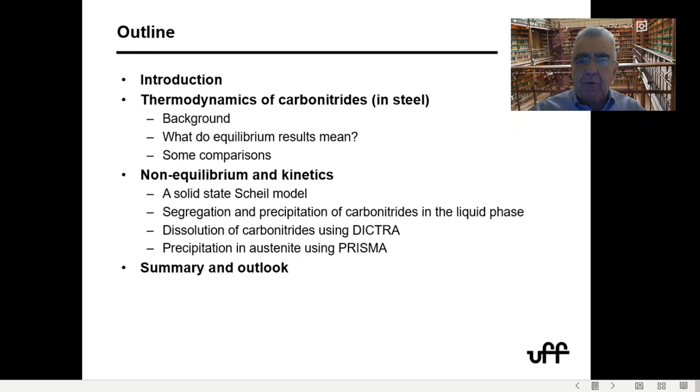The subject is the use of the CALPHAD methodology on microalloy steels. The talk outline is a brief introduction, then we'll discuss the thermodynamics of the carbonitrides, especially in steel. Since most times we are not really in equilibrium, we'll discuss methods to predict or understand what happens out of equilibrium, and also get some idea of the kinetics of these processes. Finally, I hope to give an outlook on the near future and how these methods can be useful.

If we look back on how this knowledge about carbonitrides developed, it has developed mostly in two ways: one part related to the compounds themselves, and the other part in relation to their solubility in steels.

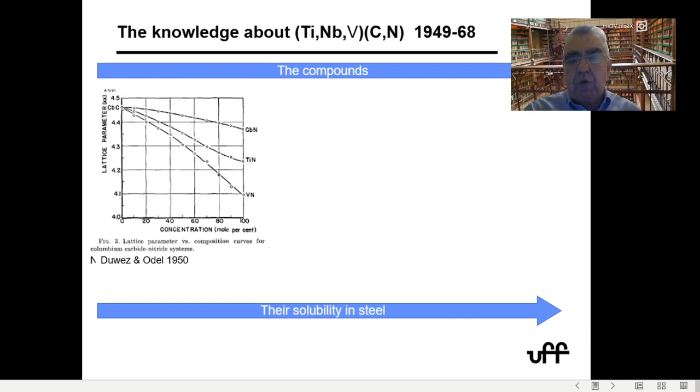The compounds were studied back in the 40s, late 40s, early 50s. This graph shows that back in 1949 it was already seen that niobium carbide, titanium carbide, and vanadium carbide had full miscibility - complete miscibility was observed. Later, very close in time, the miscibility between niobium carbide and niobium nitride was observed, as well as titanium nitride and vanadium nitride. So these cubic carbides were fairly miscible over a wide range of compositions.

Also interesting, back in the 50s, it was observed that the stoichiometry of NbN, for instance, was not exactly 1-to-1, but was somewhere lean in nitrogen. This was an important observation too.

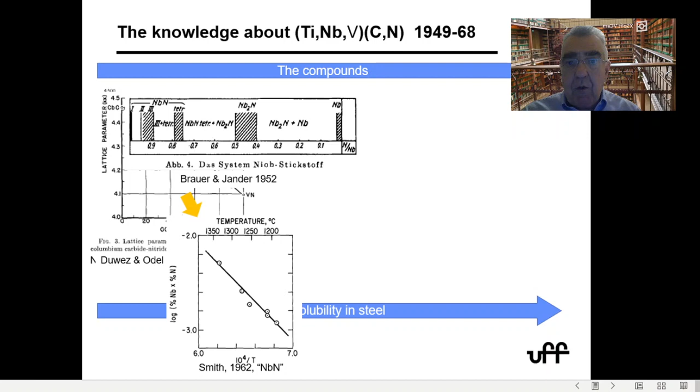Back in the 60s, 10 years after that, there was the first attempt at determining the solubility product of niobium nitride in steel, not niobium carbide. This was done by Smith, who measured the solubility of the nitride.

But 3 years after that, Mori in Japan tried to measure the carbide solubility, and observed the non-stoichiometry of the carbide, noticing a different solubility product compared to Smith's value for the nitride. He also noticed that the composition was not just niobium carbide or niobium nitride, but there was miscibility between the compounds.

Then Irvine tried to solve this by introducing an atom-to-atom ratio, but this is not really a good solution because you're not really taking into account the mixability of the two compounds.

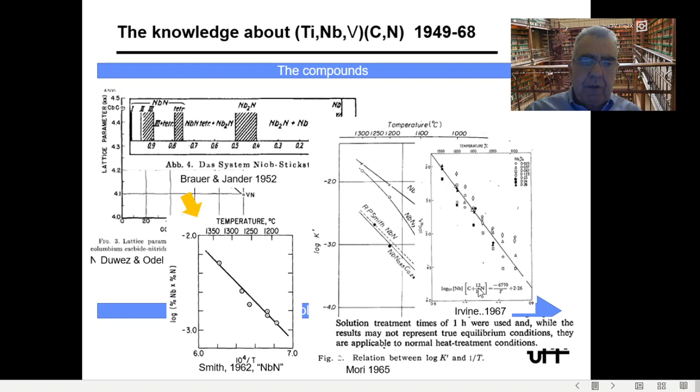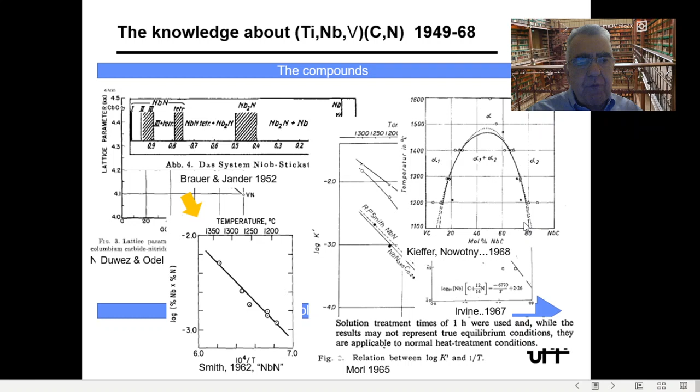Further continuing on the compounds, the people at Plansee did interesting work, and realized that some carbides, like vanadium carbide and niobium carbide, had a miscibility gap at some temperatures. So the high temperature miscibility could disappear at lower temperature - we're talking about 1200°C, not that low.

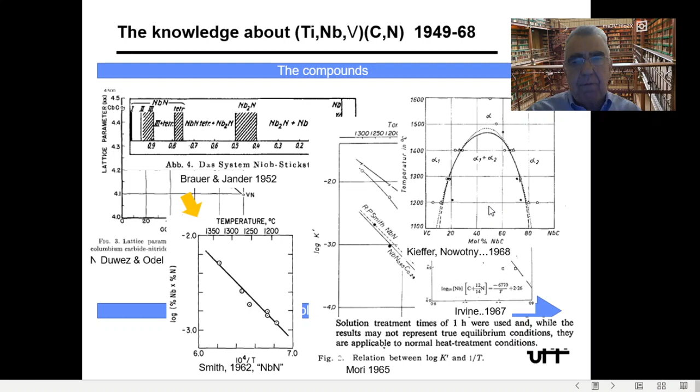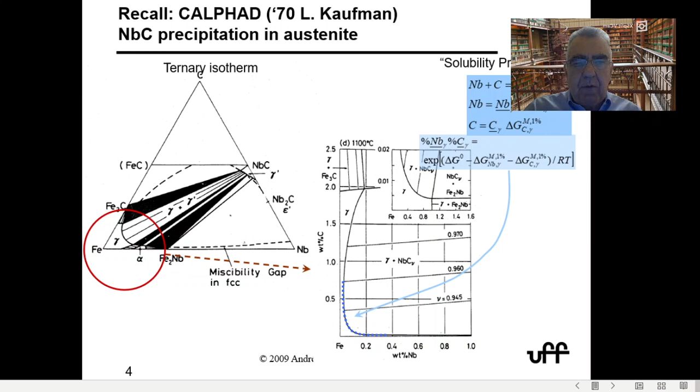Then in the 70s, the CALPHAD method came in. Using this, we could see that the solubility and the miscibilities of the carbides were very similar, and you can use solubility products to get phase diagrams. This was a big breakthrough, I think, by Larry Kaufman and the CALPHAD people.

Continuing on the same line, in the 70s Mats Hillert and Staffansson developed the compound energy formalism model - interestingly, Rudy did the same some 3 years earlier. The idea was that if you have miscibility of two compounds like titanium nitride, titanium carbide, niobium carbide and so on, you can assume there's mixing in different sublattices. This became a real important movement in the CALPHAD community, based on the mixed salt ideas.

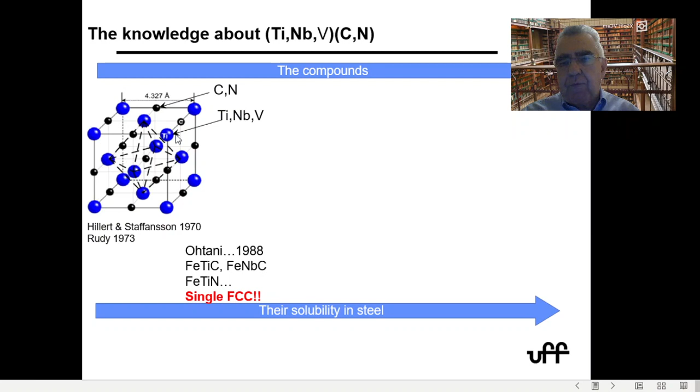Then in 1988, Hiroshi Ohtani was the first to come up with the idea of having a single FCC phase - from the FCC phase of iron to all the carbonitride, modeled with a single FCC phase. There was some improvement because Ohtani's results were not really very exact, and Balasubramanian and Kirkcaldy improved the results, but not the model.

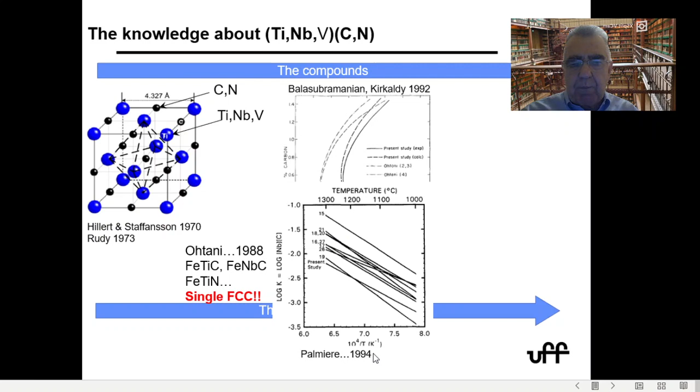And then in '94, you see the situation was already very confused when Palmiere tried to summarize all the different solubility products that we had for microalloy steels.

This continues with many assessments in the CALPHAD method and much work in the solubility product arena, mostly by Irvine, Turkdogan, and Palmiere. If we look at some results obtained with steels, we see...

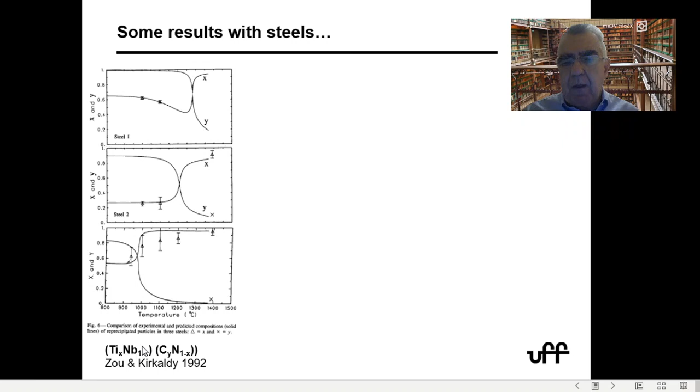Zou and Kirkcaldy, for instance, measured very carefully titanium niobium containing steels. They showed very clearly that there was compositional variation depending on the temperature. So the carbides were not really titanium nitride and niobium carbide as we would like to think, which is very simple, but they were much more complex.

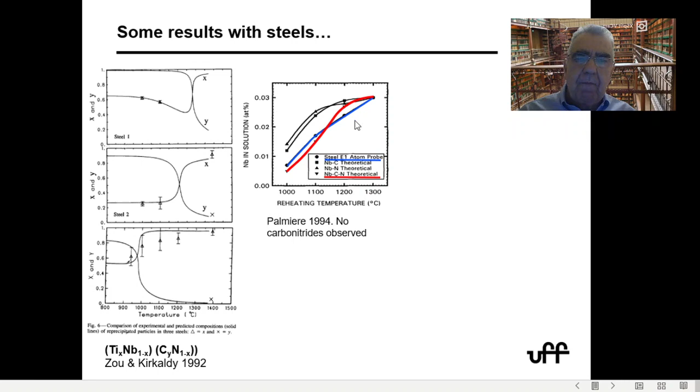Palmiere tried to simplify, and he calculated, he did atom probe, he measured the composition of the steels and the solubility, but then it's a little bit conflicting because he said there were no carbonitrides in his steel, but the best fitting for solubility was the carbonitride solubility product.

Later on with the assessment by Karin Frisk, we see very good agreement of the compositions, and also she was able, and all the assessments from there on were able to describe very well the miscibility gap, for instance here between niobium carbide, vanadium carbide, vanadium nitride, and niobium nitride. This is the region where you have immiscibility around 1000 or 1200 C, and these are values measured with TEM, so it's a real challenge to do this experimental measurement, but you can see the modeling works very well.

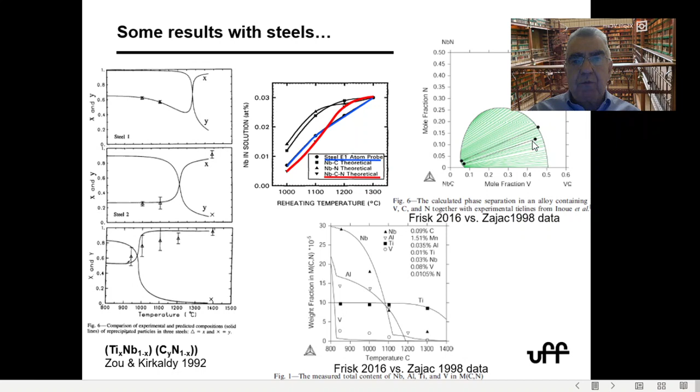Now, when you compare the values calculated by this CALPHAD methodology with some classical solubility products, you see, for instance, if you do it for one of the steels that Palmiere used experimentally, that the value he calculates or proposes with this formula is quite different from the value you calculate with the thermodynamic databases, considering that the compound is not exactly niobium carbide, but a carbonitride.

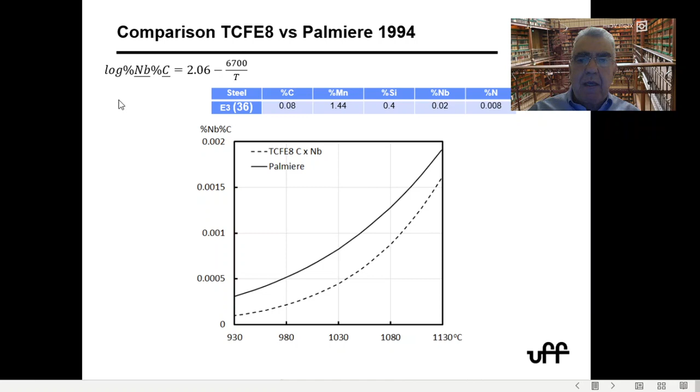The same happens if you take Turkdogan's compound, in which he assumed a fixed stoichiometry, because this is not really happening, that you have a fixed ratio of carbon to nitrogen. And if you project this surface into a plane, you can see that the values for solubility are much different because there's no way you can really take into consideration the influence of varying carbon and nitrogen in the compound.

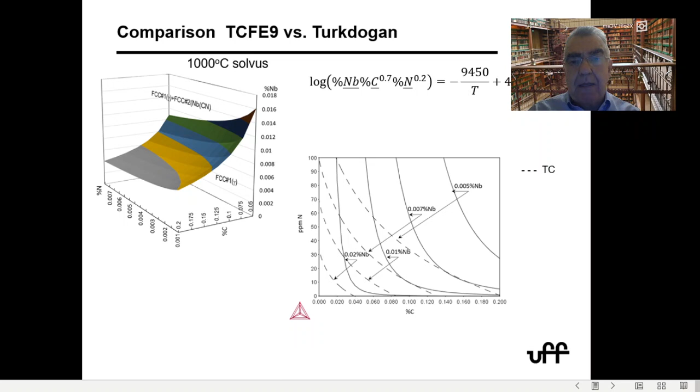So the values predicted by these simple formulas are not very accurate compared with computational thermodynamics. Now, of course, the fact is that when Turkdogan and Palmiere did this, it was not very easy to take into consideration all this data. Now the softwares are available, and you can do these calculations rather easily.

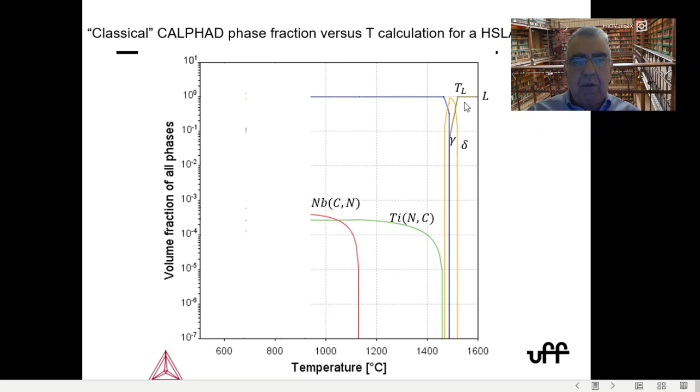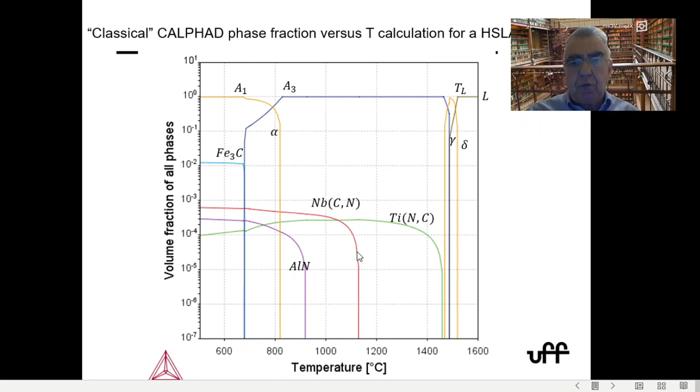So you end up doing this classical temperature versus volume fraction of phases for the steels. And if you start with the liquid, you can see the liquidus temperature, you can see the formation of ferrite, you have a peritectic reaction, then you precipitate one carbonitride, which is richer in titanium. I just simplified here, of course. Then a carbonitride that is richer in niobium, more like a carbide, then aluminum nitride, and so on. This gives you very easily the solubility or precipitation temperature if you want to reheat this steel to dissolve the carbide and so on in equilibrium.

Now, if you want to really look into more complex steels like this one, which is a vanadium, niobium, titanium steel, and you take into consideration the whole composition, you see that again you have a first FCC phase that is a titanium carbonitride, mostly rich in titanium. Then at around 1100, you precipitate a niobium carbonitride. Then at a lower temperature, you precipitate vanadium nitride with carbon on it. And you actually see all these compounds when you do TEM on this steel.

Interesting enough, when you try to look at the composition of this FCC phase, you have a very strange variation. The titanium, for instance, is very high, about 90% of the metallic content in the carbonitride at high temperatures. But when you come down in temperature, the titanium does not stay very high, and you have lower and lower titanium, with niobium and vanadium increasing.

Now you may think, well, this is very strange, because how is this titanium going to come out of the precipitate and the niobium going to enter as it grows? Of course, this is what would happen if you equilibrate your steel at these temperatures, and not what will happen if you process this steel at a constant speed of cooling, for instance.

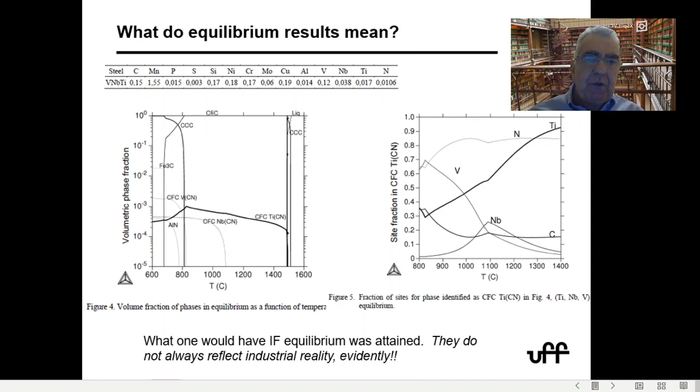And also, if you're looking at the thermodynamics, there's really no sense in introducing kinetic deviations on the solubility products. Those should be done afterwards, when you're doing the actual kinetic calculations with the proper thermodynamic data.

So in summary, computational thermodynamics can now give you a very consistent prediction of equilibrium information for these carbonitrides of all the microalloying elements, considering not only the different compositions and temperatures in which they occur - which is already a big challenge, since they occur from relatively low temperatures in steels, like vanadium nitride, to very high temperatures for titanium nitride.

But you can also take into consideration the effect of other solutes - how manganese affects this, how carbon affects this, how silicon affects it by changing the activity of carbon. So there's a whole range of information you can get here for your alloy design that you could not get just by doing a simple solubility product.

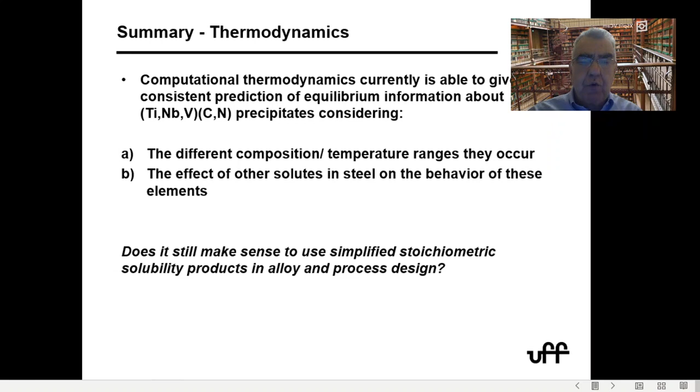So the question is, does it still make sense to use a simplified stoichiometry, a fixed solubility product, when you do your alloy design or process design? I'm not going to answer this - it stays as a question for you.

Now, when you try to add these more expensive microalloying elements in steels, you have to be careful, because sometimes you have significant losses, not only in steelmaking, but also in solidification. You can see titanium nitride precipitating as relatively large particles, and sometimes even niobium and vanadium being present in these particles. So one important thing is to model what's happening during solidification, so you can better design your alloy to avoid this.

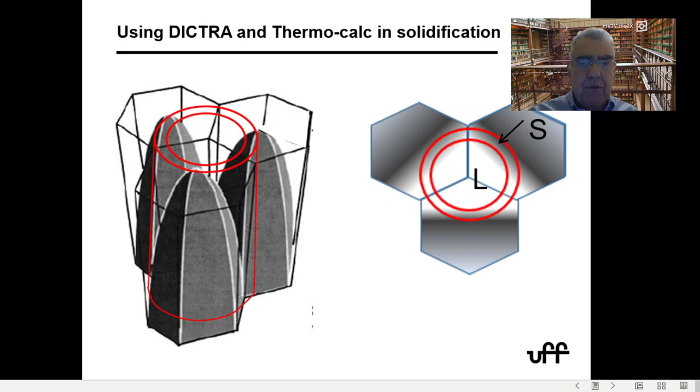So what we do is take the secondary arm spacing to model the segregation. Since DICTRA can only handle simple geometries, we imagine that this interdendritic space is like the center of a cylinder placed in this position. This is more or less the physical model we're doing with diffusion. DICTRA can only model diffusion, but it models very accurate diffusion with the proper thermodynamic data and proper interaction of the diffusing elements.

Then we go back to measuring the steels - this is a microprobe measurement - to find the secondary arm spacing, and with this we can derive the cooling rate. If we do the microprobe for these two steels as an example, we can get the secondary dendrite arm spacing from this; for this steel there was only primary dendrite arm spacing. Then with the Suzuki relationships, or any other good relationships, we can derive the cooling rate at this position.

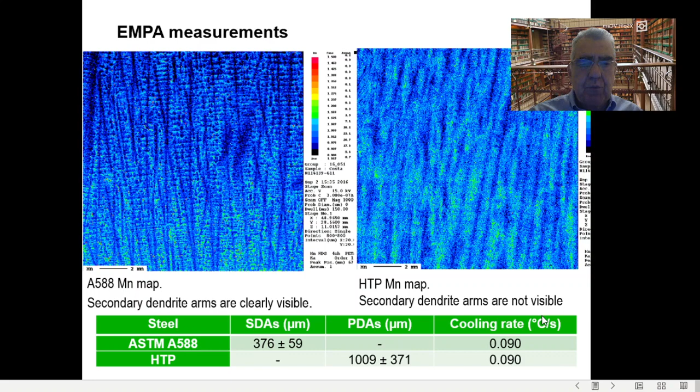Now with DICTRA we can model the segregation. The blue line is the segregation as modeled from the interdendritic region, from the center of the dendrite to the interdendritic region, and the green squares are the experimental points from the microprobe. You can see that DICTRA models the segregation fairly well - I chose manganese to present here because we did all the microprobe measurements using manganese.

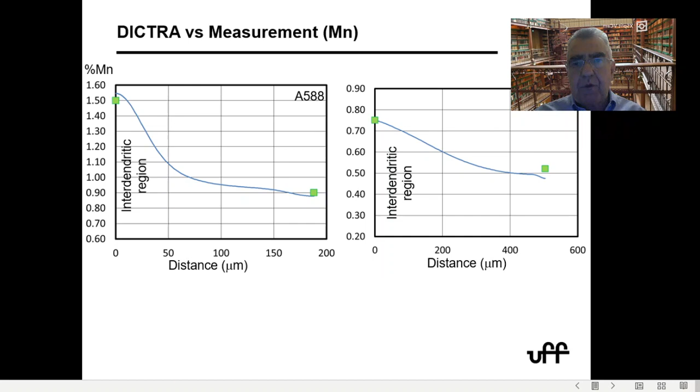And you can see right away that not only is the modeling good, but a byproduct of this is that if you increase manganese and increase carbon - which is the case with this steel - you get much more segregation. This is going to be a problem for your niobium and titanium, which will also segregate when they are pushed by the liquid.

We can also use a one-dimensional or zero-dimensional model, the SCHEIL model, in which you assume that elements go into the liquid and partition but never partition back to the solid. It's a very classical way of describing solidification, devised back in 1942, I think. With the SCHEIL model, if we exaggerate the segregation, we can also see when these carbides or carbonitrides start to precipitate during solidification.

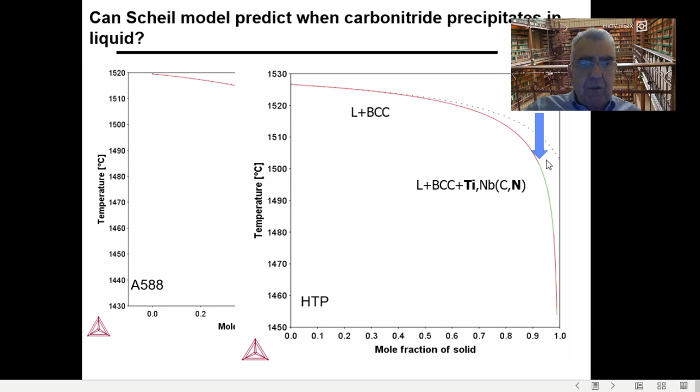Now, when you compare the two methods, the more sophisticated diffusion methodology with the SCHEIL methodology, we find that the temperature at which the carbonitrides precipitate is very similar, maybe 10 to 20 degrees difference. So if you're looking just at the temperature of when precipitation happens, it's not too bad. You can use either one.

If you want to really have a better look at what's happening during solidification, diffusion modeling is much better. So what we can do is quantify how much microalloying we are losing to large particles, because this is never going to dissolve completely again. And then we can also evaluate how the segregation of carbon, manganese, silicon influences our titanium and niobium losses due to segregation.

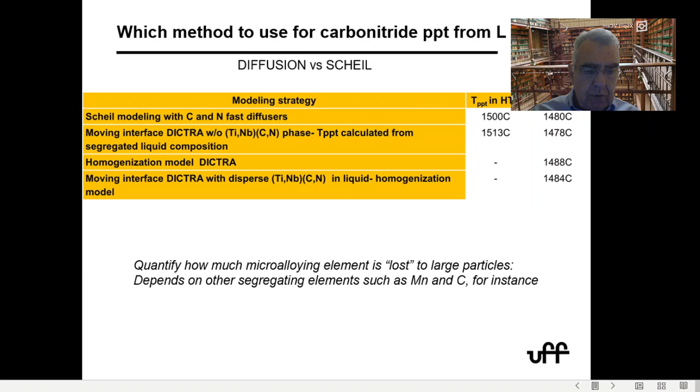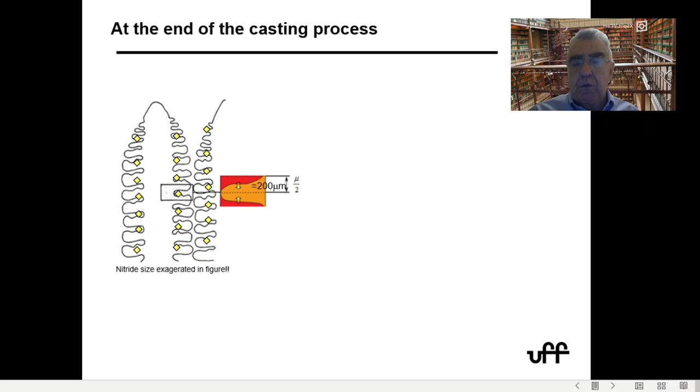So at the end of the casting process, if we have titanium additions, you can have a very dramatic situation. I put very large nitrides here so they're easy to see, but you have nitrides which are not uniformly distributed, and they may also have niobium or vanadium in solution.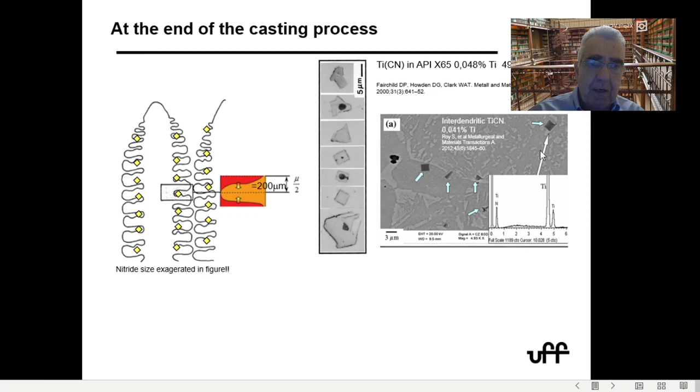This is also on a microalloyed steel, and you see this is the interdendritic region, with a lot of particles collecting here. This is another work by our group in which you see very large titanium carbonitrides, and you also see relatively large particles of titanium nitride in segregated regions.

So this is essentially material—alloying elements that you paid for, you add to the steel, but you're not going to be able to use it because it's going to be present as large particles that are not going to dissolve afterwards.

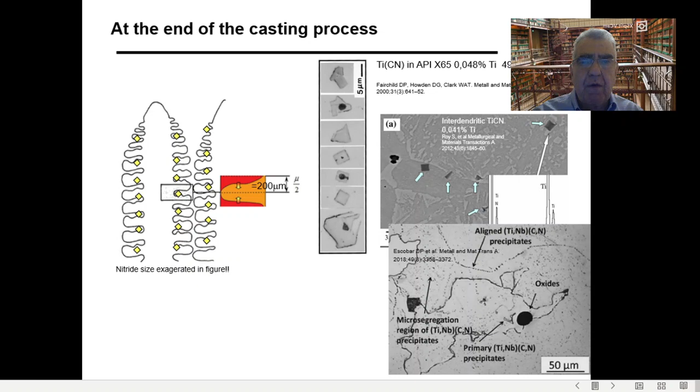So when you go now with the plate into a plate furnace, you're looking into dissolving particles so that you can have mostly niobium and vanadium in solution. Niobium is going to have a nice effect on austenite grain size, and vanadium may precipitate afterwards.

And nowadays we are also looking at titanium to precipitate at very low temperatures, like 500, 600 degrees, maybe during coiling. So it's really important to understand how much you're dissolving of what.

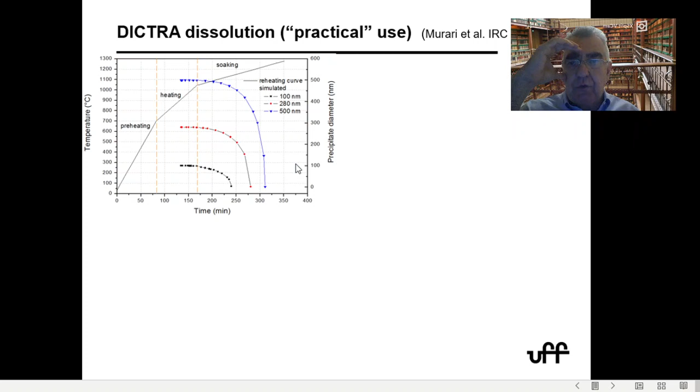Now, one way of looking at it: if you have your heating cycle for the plate—this is an industrial heating cycle—then you can use DICTRA or a diffusion model to calculate for different size particles how they dissolve. And then, using the same heating curve, you can calculate how much niobium you have in solution, depending on the size of the particles.

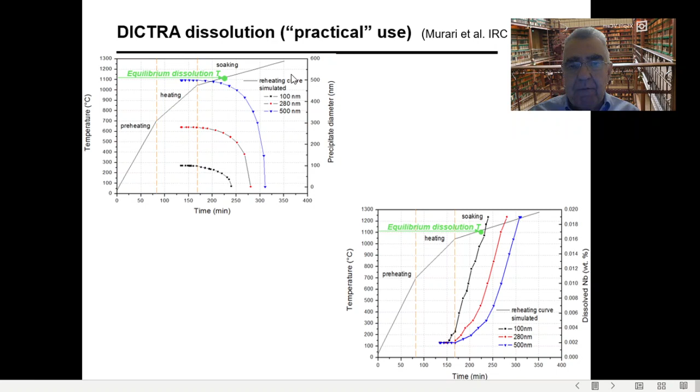So with this information, you can actually get how much niobium you're going to have in solution to help you during rolling. Keep in mind this is not happening at equilibrium dissolution, because it takes a long time to dissolve if you're going to the equilibrium dissolution temperature. So normally you have to overshoot, heating higher than just the equilibrium temperature.

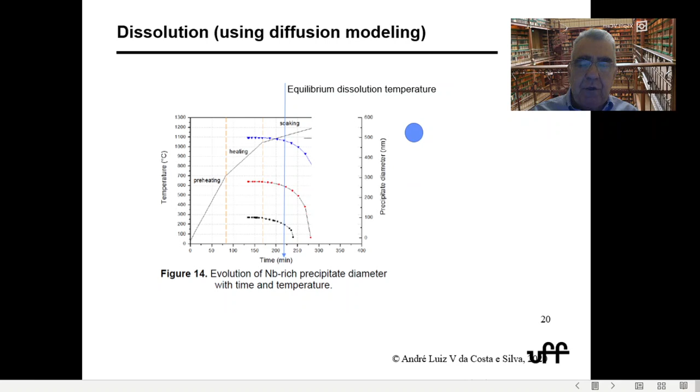This is the same idea, just a little animation. When you reach the equilibrium dissolution temperature, some particles dissolve completely—the small ones. If you continue, then the medium ones dissolve, and if you want to dissolve a half-micron size particle, then you need more temperature and longer time.

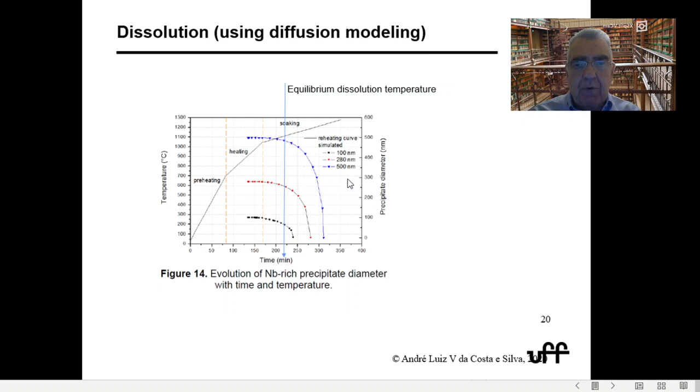So this is what you have to do when you design your process: you have to know what happened during solidification, what kind of carbonitride you still have in medium to large size, what is lost and what is not lost. So if you assume that half a micron is the size of carbonitride you want to dissolve, you can fairly well design your plate heating to achieve that.

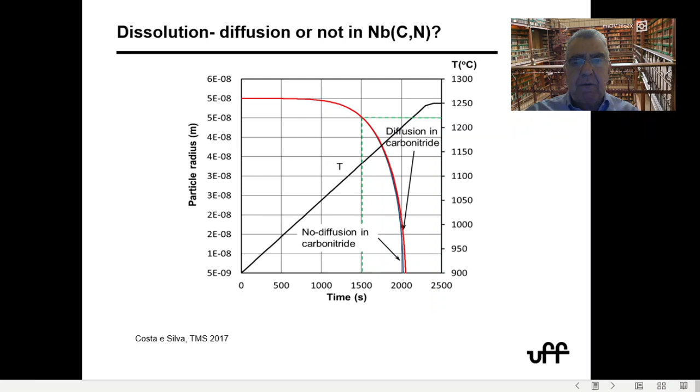There was a question some years ago whether there was diffusion in the carbonitride or not. Physically, you would believe that there's no diffusion inside the carbonitride. But we did calculations assuming both, and the controlling step was not the diffusion in the carbonitride. So essentially what we found was that it's not relevant whether the diffusion is happening in the carbonitride or not.

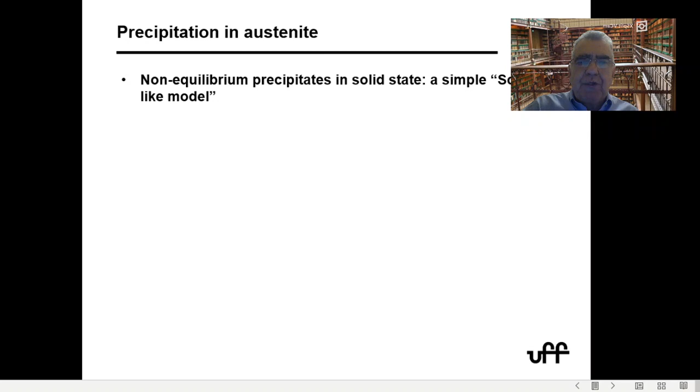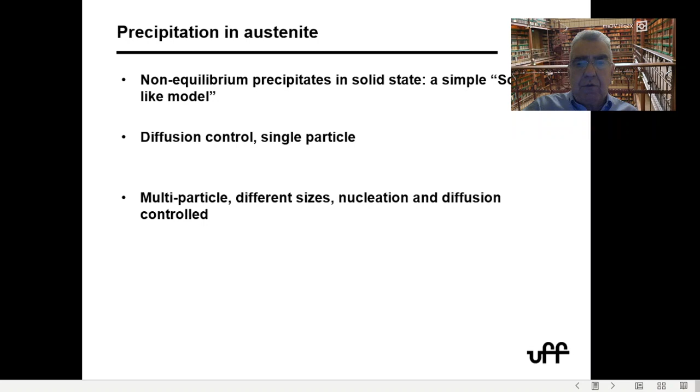Now, the most interesting thing is that people do a lot of work only on the precipitation. Of course, there's a lot of information that is essential for proper processing happening before the moment you're going to do precipitation. We can do a simple SCHEIL-like model in austenite that gives a very nice prediction. We can do diffusion control in a single particle, which I don't think I'll show you today. And then you can do multi-particle, different sizes, nucleation and diffusion control, which is the latest news in the area. So I showed you this case a little bit ago.

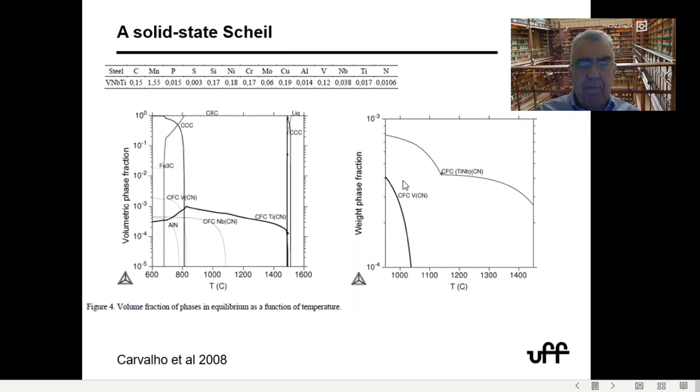Now if you assume there's no diffusion inside the particle, and there's perfect diffusion in austenite, you get very close to a SCHEIL model. We did that back in 2008, and presented it in Italy too. So you see this phase fraction change. Instead of having three different FCCs or three different compounds precipitating, you have one, and then it changes dramatically the speed of precipitation with temperature, and then we have the vanadium carbide here. So there's a big change already in the fraction of precipitates.

Now, if you recall the composition of the equilibrium carbonitride I showed you, and we do the same with this SCHEIL model, we have a much different change. We have less titanium, so this is like forming in layers. We have that initial layer which is titanium nitride, and then it continues, forming layers more and more rich in niobium, until you get to a point where it changes to niobium carbide. This is happening when you look at the phase diagram, where there's a huge miscibility gap between the four compounds it can form.

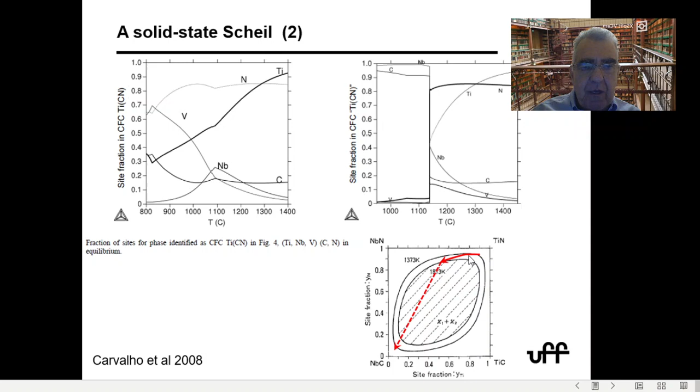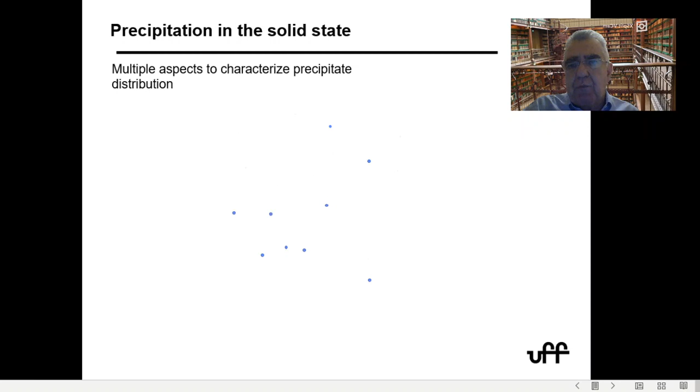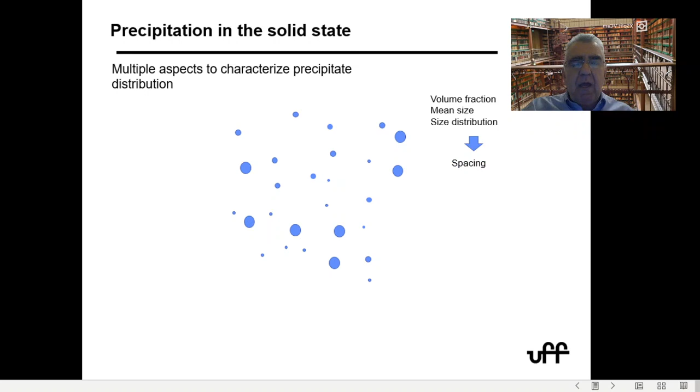Now, the problem with precipitation in the solid state, and that's why I'm not going to show you DICTRA calculations, is that there are multiple aspects needed to characterize the precipitate distribution. Reality is much more complex than a single particle, so you have to look into volume fraction, mean size, size distribution, and then you need information about spacing, and also try to predict the effects.

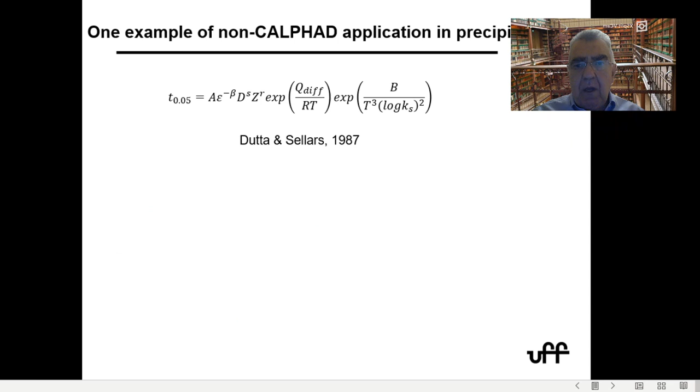Now, what people have been doing is using very classical equations, taking the classical formula for nucleation and growth, like Dutta and Sellars did. It's very nice work, calculating the time required to reach a certain volume fraction of precipitate. As this goes on, the thermodynamics is here, right? This is the solubility product. As this evolved, we got to a point where some authors now say that this value A, which was by Dutta and Sellars and was supposed to be a constant, is not really a constant. It depends also on the solubility product.

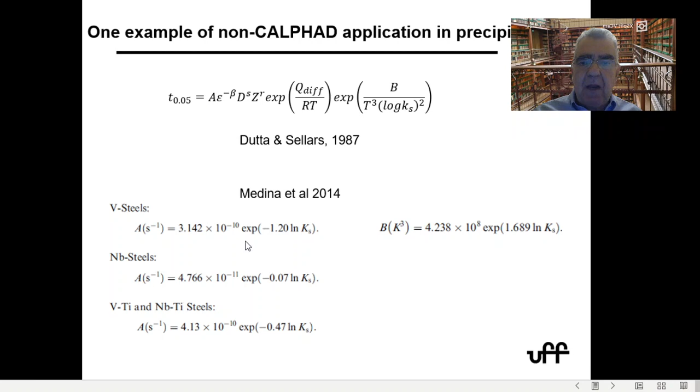If it is, then it depends also on which elements are present. So the question I want to pose is: does it make sense, when from theory this is supposed to be independent of thermodynamics? Now you have a solubility product here too. So when you use classical theory for nucleation and growth...

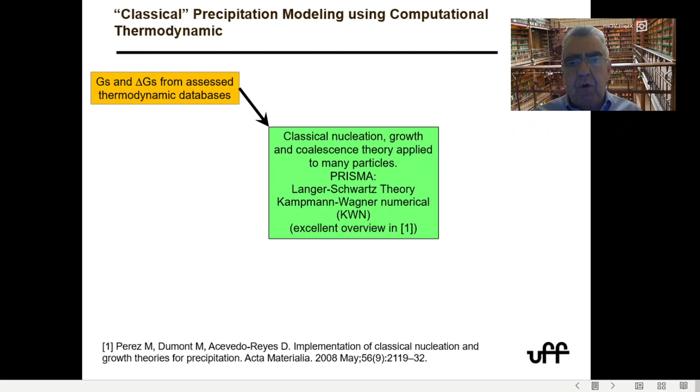There are some very interesting models now. There are 3 or 4 software packages that do that. You take the thermodynamics, you take the diffusion data, and you take a number of experimental information like grain size, dislocation density, and so on. And then, if you are able, you also need to know the interfacial energy.

And then you are able to make predictions using the classical theory, but not just by hand waving, but by using really correct free energies and correct mobilities. And this is very, very promising.

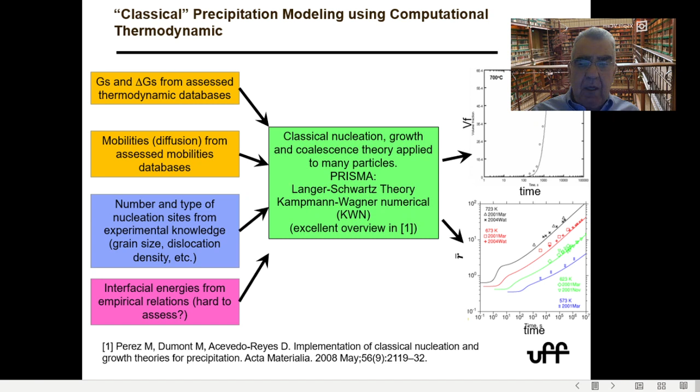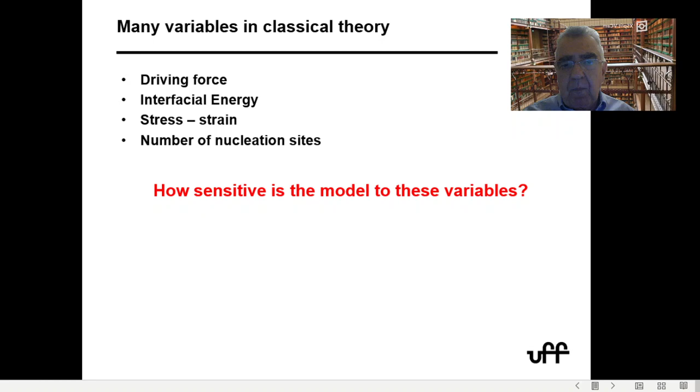Now, of course, the classical theory involves driving force, interfacial energy, stress and strain, number of nucleation sites. And so the question is how sensitive the model is to these variables. And the problem is it is very, very sensitive.

If you look at the interfacial energy, all the formulas for critical radius, for the critical barrier for nucleation, they all depend on the interfacial energy. So this is the critical parameter. And unfortunately, if you look at the literature, they used to be determined by nucleation and growth experiments. So it's kind of a real bad cycle.

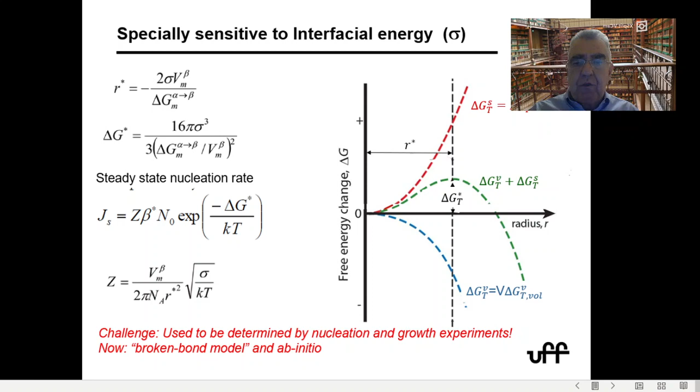Now the softwares are using these broken bond models and ab initio calculations to try to solve this. If you go to the literature and look into the interfacial energy between austenite and nitride or carbides, there's values everywhere. You can find from 0.1 to 1.5 joules per square meter.

So essentially what becomes is you have a very, very sensitive model to a given parameter. Then this parameter varies immensely when people fit or measure or whatever. So it becomes a very dangerous exercise because you can almost fit anything by adjusting this little parameter.

And then worse than that, you can go in the literature and say, well, when you find that it was 0.4, you say, wow, this was according to this reference. And then you say, wow, fantastic, I solved my problem.

So the new softwares now, they have models in which they calculate sigma as a function of temperature and composition. This is just a graph from Prisma that shows you the effect from 0.51 to 0.66, how it varies at a given temperature just by varying nitrogen and carbon.

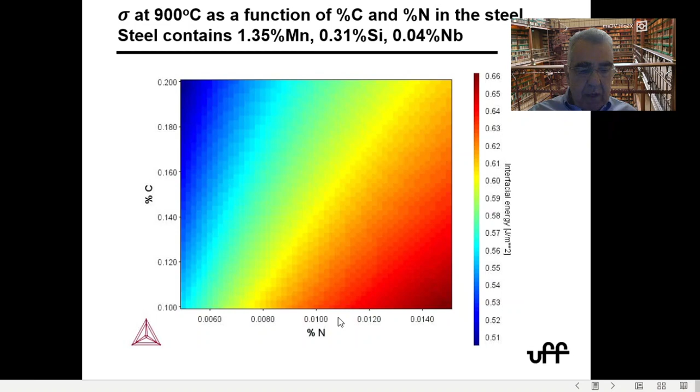So I'm going to show you just one of the adjustments we did for niobium carbonitride with the classical work of Le Bon back in '75, because this is not easy. The experimental work is very difficult to do too.

So if you look at 900 degrees strain free, and all you steel makers are really interested here when you have niobium precipitation. This is temperature, this is niobium in solution. So this means that as the time goes here, you have less and less niobium in solution, so you are precipitating. And here is what's happening, how fast you precipitate when you have deformation.

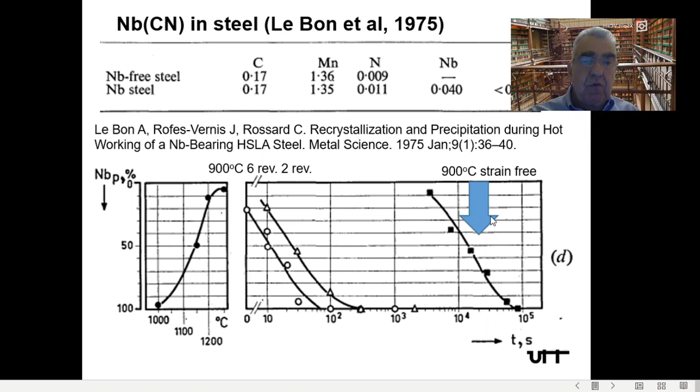But keep in mind that you're not just, when you do this, changing this one parameter, niobium in solution. You're changing dramatically the number density of particles too. So if you change the interfacial energy that you're trying to fit your model, the number density changes, the size changes, everything changes. So it's very, very dangerous to go on just fitting this number like if it was a fitting parameter.

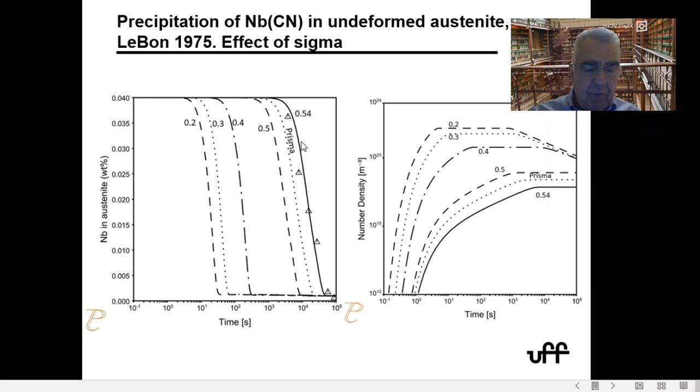Now, when you do multi-particle simulation, you have to take into account that there's increased diffusivity, maybe because of pipe diffusion. The nucleation barrier decreases because you have deformed material that has maybe higher energy. And the models cannot take into consideration the undissolved precipitates. So you have to, in principle, ignore that there is a little particle there that is going to act as a nucleus for what's going to happen.

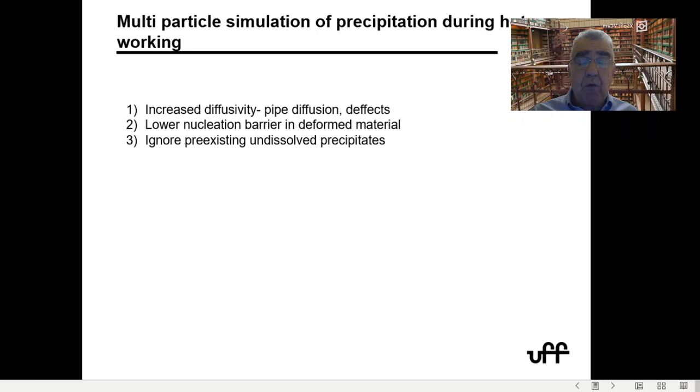And then we don't have a model yet that can do, for instance, interphase precipitation. We can only do a single matrix. But this is already a big challenge if you're looking at the carbonitrides in austenite.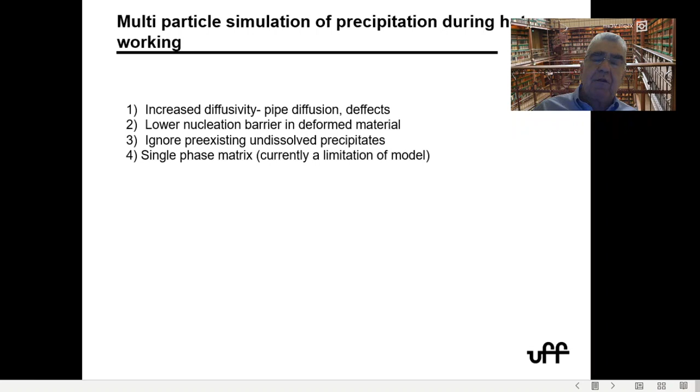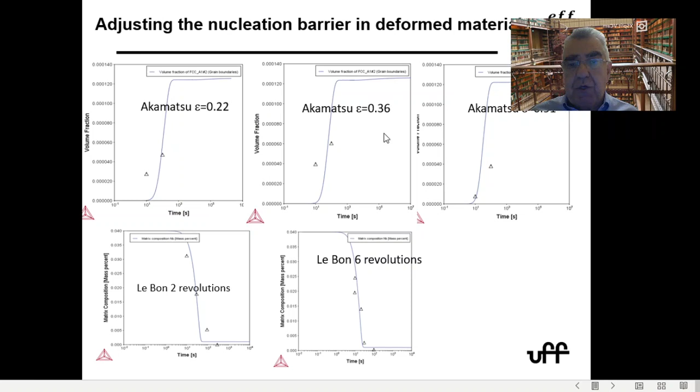So what we did was we created an effective nucleation barrier using an adjustment in the interfacial energy. So we got some classical results from literature about the effect of deformation on the recrystallization, on the precipitation of niobium carbonitride from various authors. And then we had the effect of the deformation on the nucleation barrier.

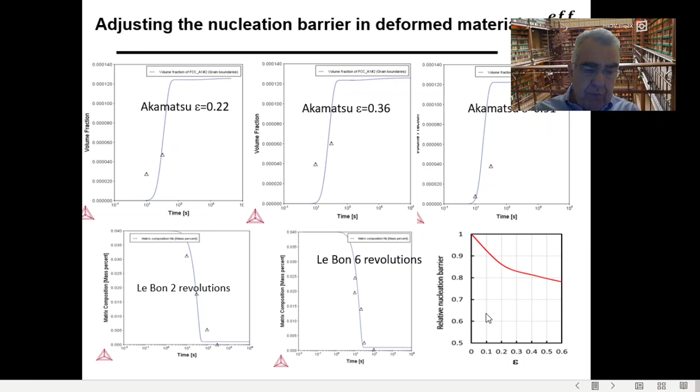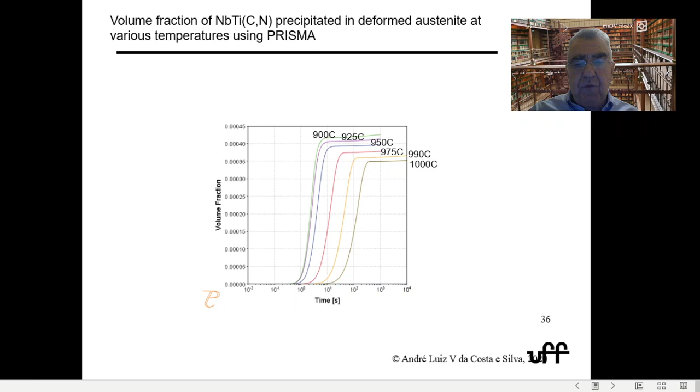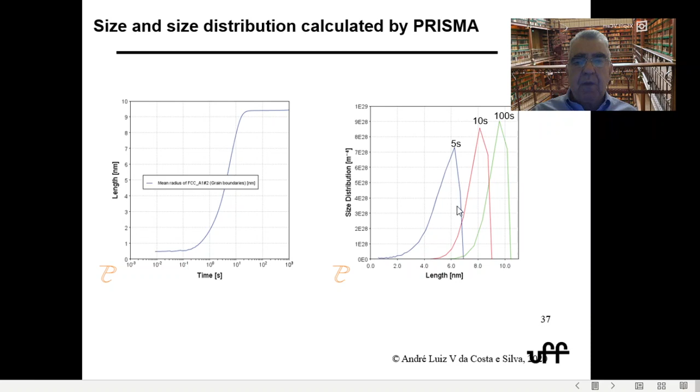So this now is fed back on the model, and we can do a volume fraction versus time precipitation for niobium carbide in a given steel. And we can then, if we want, take the 5%, and do this at different scales, seeing the size of the precipitates as it moves along in time. This is very interesting because we can also calculate how, for instance, the niobium in solution is going to vary as time goes by and precipitation happens. So you have a lot of information you can use to better understand your recrystallization.

So currently we have work in progress relating this. For instance, this is a double deformation test, and this is the no-recrystallization temperature for this steel, a classical microalloy steel. This is the 5% precipitation curve for niobium carbonitride, which is fairly reasonable. For a higher niobium, lower carbon manganese, we have this discrepancy. But it's very interesting because we think this is perhaps more accurate than what we were able to do in the deformation test, so we are testing this.

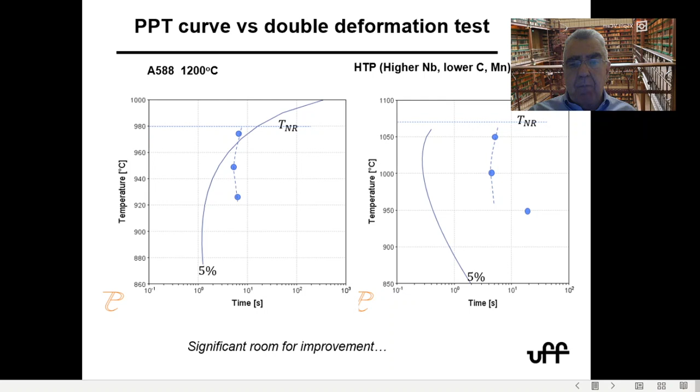And of course there's significant room for improvement. This is when you get the data from Vervynckt, and instead of just looking at the volume fraction precipitated—because that's a real simplistic way, since you're not taking into consideration the size of the particles.

Now if we go back to Zener's theory and say the Zener factor depends on the volume fraction divided by the particle radius, I can plot for 1000 degrees, which was one of the experiments they did. I can plot the Zener force and say there's a maximum Zener force here to prevent grain growth, and then it starts decreasing, and it's probably not going to be able to prevent recrystallization at some point. These are the results of Vervynckt.

It's a classical double deformation test. It stops here, the recrystallization, then you have some time. And why do you have some time? It seems like as the particles are coarsening, the Zener factor is decreasing, and then you're having recrystallization again.

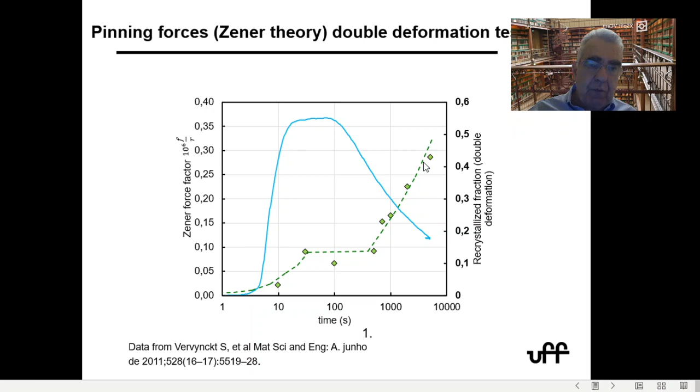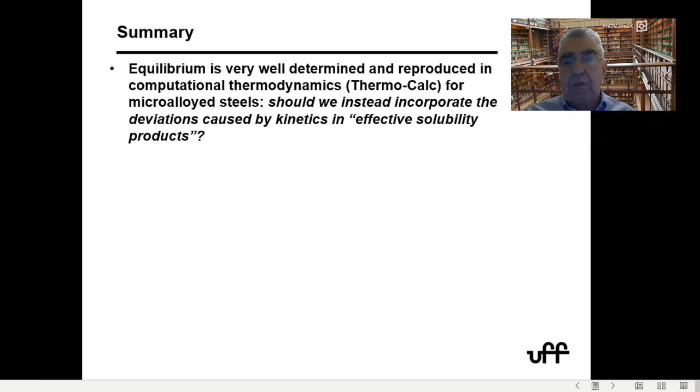So in summary, to not go too much over time, I think equilibrium is now very well determined and reproducible using computational thermodynamics. So I think it's very dangerous that we keep using effective solubility products, including those that people say are better because they were determined in industry. Of course it may be better if determined for your steel in your plant, but if you're trying to use something empirically determined in another condition, it's going to be very difficult to fit, and probably not useful for extrapolations and alloy design.

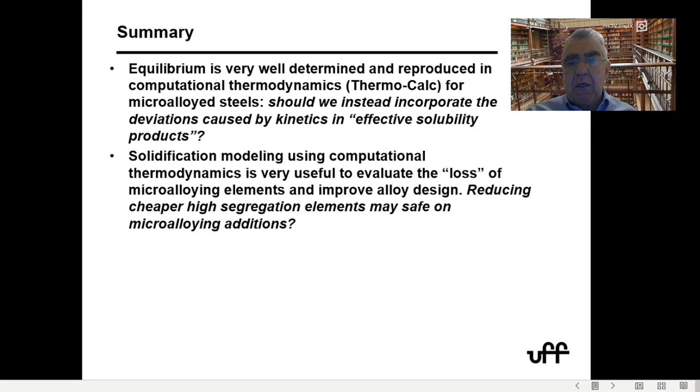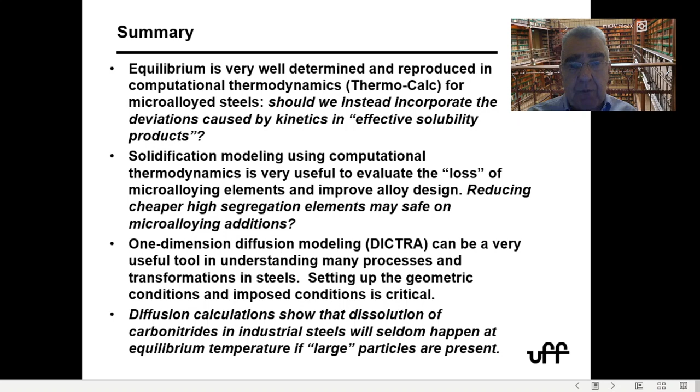Now, the solidification model is very useful and is helping us a lot to evaluate what we're losing in microalloying elements, because they are not cheap. So we can probably improve alloy design, reduce additions of higher segregation elements, and save on microalloying elements. The diffusion modeling we use in DICTRA can be very useful to understand, especially, the dissolution processes. This is what we've been doing, and it helped a lot to use as much as possible the niobium that we have in the steel.

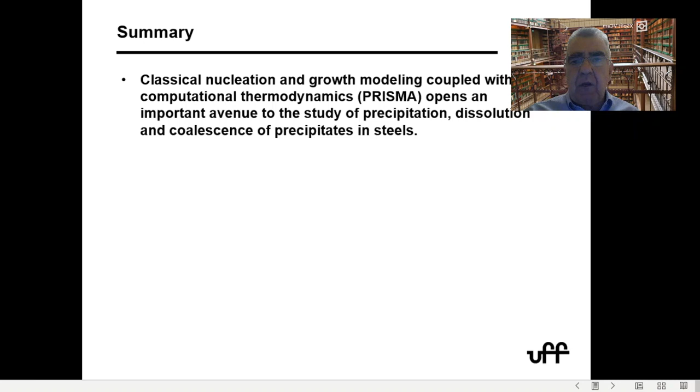And then the classical nucleation and growth theory is now used coupled with computational thermodynamics. This is a fantastic avenue to study precipitation and dissolution, and I hope that in the next years we'll be able to really do some forecasting, or maybe careful adjustment, and develop new steels based on these models. So I think the improvement we are having in interfacial energy measurement, diffusion, and nucleation are critical aspects now.

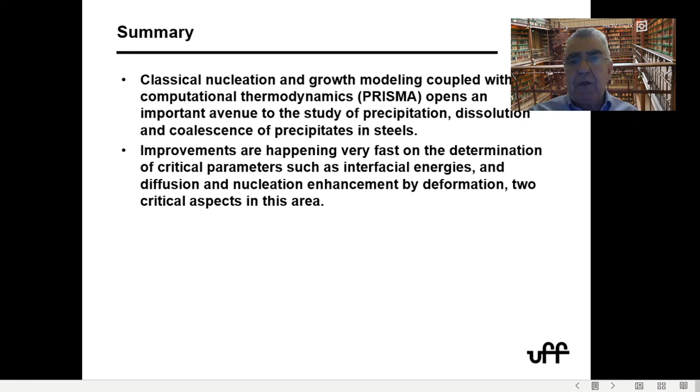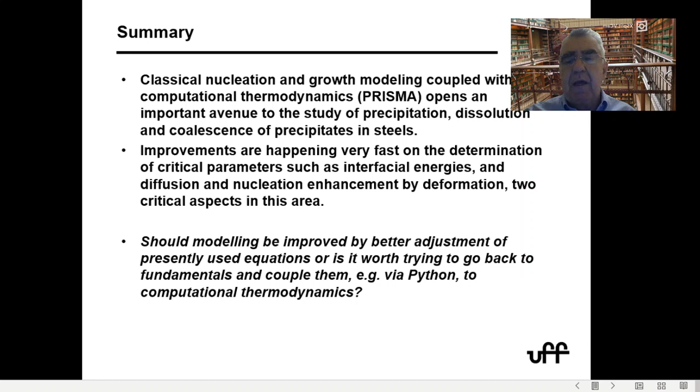So the question again is, should we improve our modeling by better adjustment of these empirical equations, or is it worth trying to go back to fundamentals and couple them? All these softwares now have very easy interfaces, so you can make your model interface with Thermo-Calc or other software we've seen before, using Python or whatever. So it's a question—are we going to continue using empirical models, or can we improve a little bit?